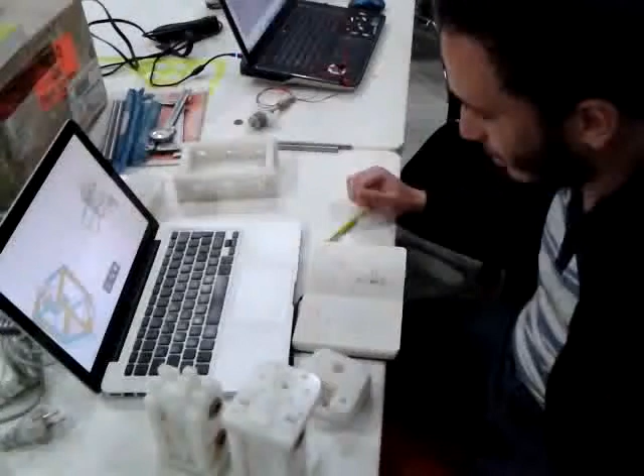So basically, we need to design how we're going to do the movement in the x-axis and the z-axis. So what we originally had is this piece over here. For the x-axis, they had a lead screw that turned and moved it in the x-axis. For the z-axis, they had another lead screw that went over here and would move it in the z-axis.

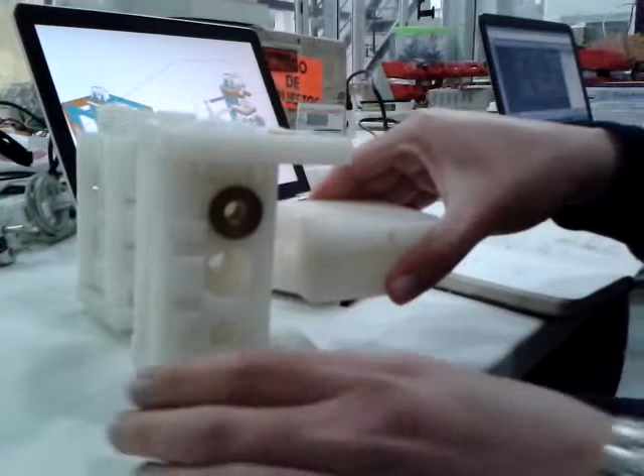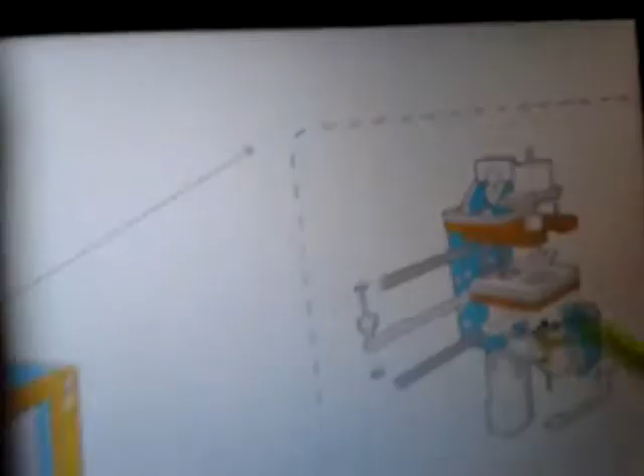So what we propose with Giampieri is basically adapting what they did in their timing belt design, which we can see in the computer here, in which they have the belt for the x-axis here, and they have the belt for the z-axis here. So back to our drawings,

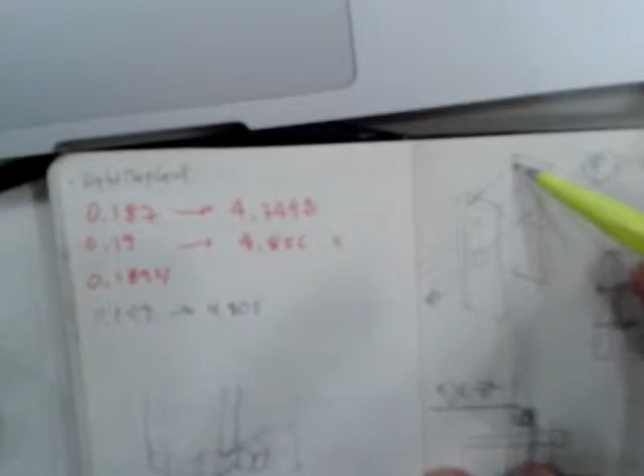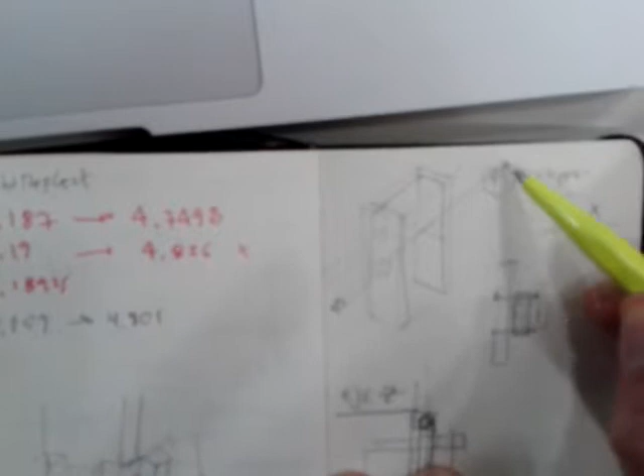we can make the belt go through the pieces, through these holes in here, and attach them somehow with screws, and this could be a plate somehow, and then we attach it to this back wall, and in that way we can create the movement in the x-axis with the motor, the stepper motor being outside. Well, we would have to attach it somehow to the general casing, and for the z-axis, well, we would create a similar solution. I think we have a better drawing in the next page.

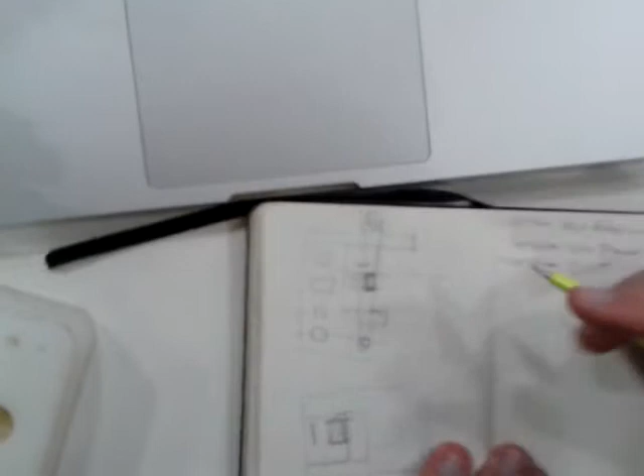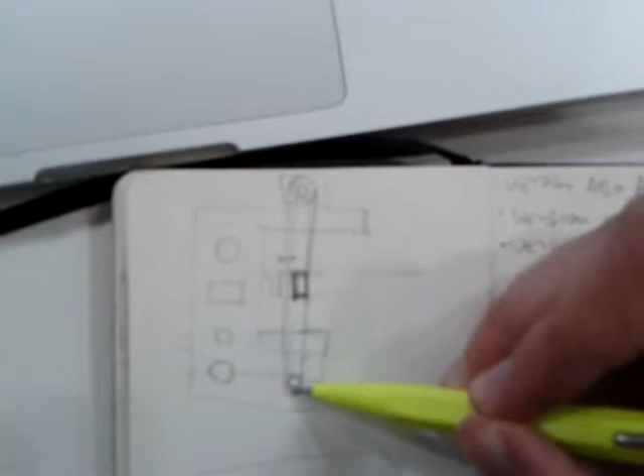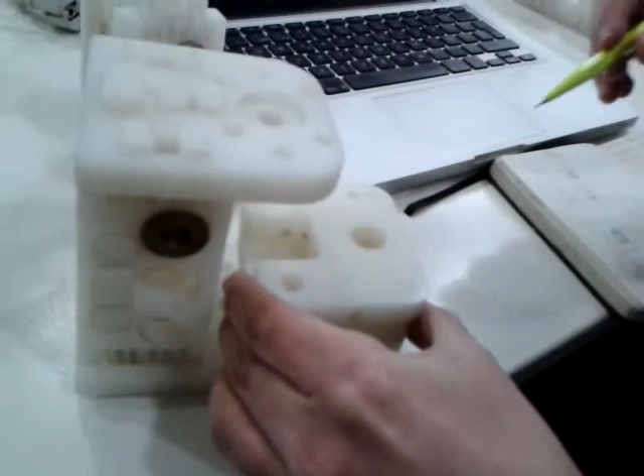For the z-axis, well, this is the motor for the z-axis. These are the rods for movements in the x-axis, and this is where the belt for the x-axis would move. So now we would make sort of an L shape here to have here a rod to have the pulley for the z-axis, and here this piece here is basically the same piece, but now it would be moved by a belt that we would need to attach somehow to this wall over here.

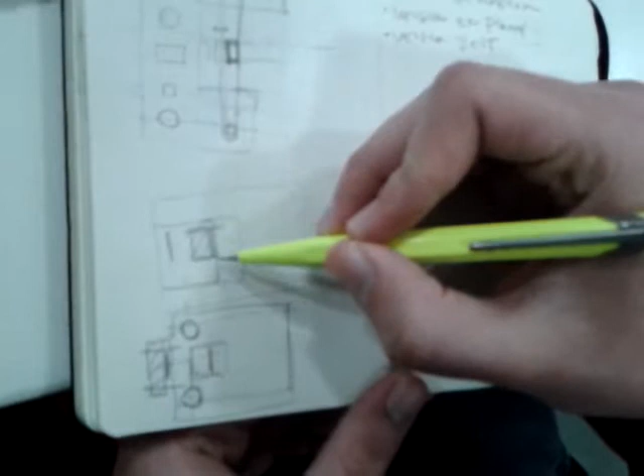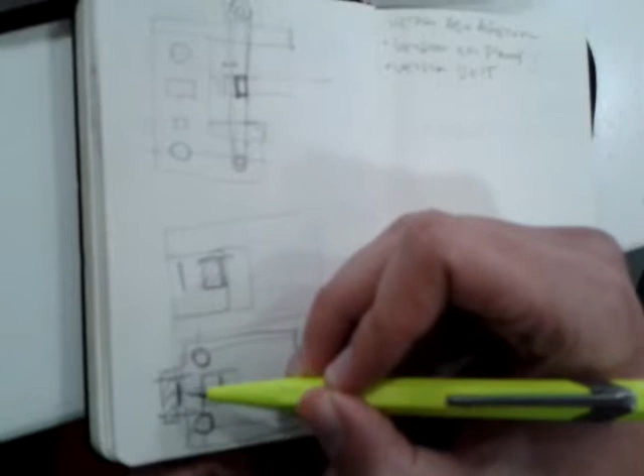So the way to attach it, well, it can either be by creating an inner hole and using the same plate solution that we mentioned for the x-axis, or we can move the plate, instead of being inside the hole, being outside the hole here, to attach the belt. This is the belt, and this is the belt too. So we would attach this side of the belt here, and that's basically our proposal. We need people for drawings and dimensions.